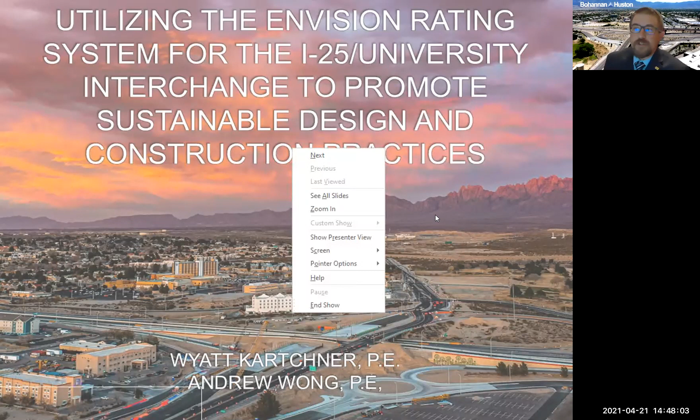Thank you, ladies and gentlemen, for joining me this afternoon for the Alternative Construction and Sustainable Infrastructure session. My name is Roy Gibson, Vice President at Bohannan Huston and ASCE New Mexico Section Past President. First and foremost, I'd like to thank Wyatt and Andrew for sticking with us on the preparation of this presentation, which we originally planned to present last year.

You'd be driving through this construction right before you come into this big conference, but unfortunately we did not have a conference at the location. However, over the past year, we have really seen the growth of the I-25 University project, the team working through the pandemic to deliver a successful project to the department and Southern New Mexico. Everyone on the team has truly created a miracle by working through the pandemic and getting this all completed.

Wyatt Kartchner is a fellow Aggie alumni and principal of the Molzen Corbin Southern Region. Mr. Kartchner was the overall consultant project manager in charge of the I-25 University project that is currently under construction right at the doorstep to NMSU. Andrew Wong, another fellow Aggie, is a project engineer and Envision professional with Molzen Corbin out of their El Paso office.

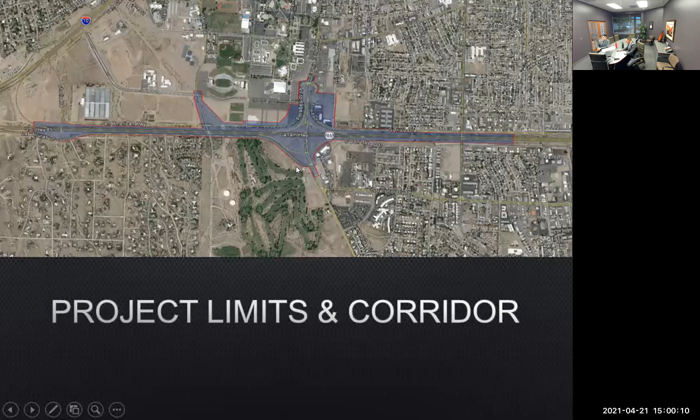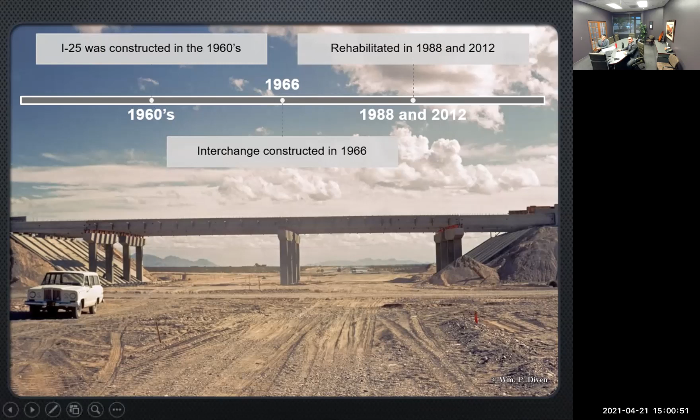What the traffic movements show is that there's a lot of people traveling south on I-25, exiting at University Avenue, and then trying to scoot over quickly across 2 lanes of traffic to turn left into the NMSU campus. At that same time, there's a heavy volume of traffic on University Avenue also trying to go in this direction, and that creates a lot of congestion and traffic at those places.

We also had lots of pedestrian and multimodal issues that we needed to address. We'll talk about this in more detail later, but on University Avenue, there was only sidewalk on one side, there was no pedestrian railing on the bridge, and Andrew will talk about how the bicycle lanes on the bridge were actually kind of terrifying. All of those things needed to be addressed. There were also some geometry issues with the southbound off-ramp, and all of these things combined really created safety problems throughout this entire corridor, which was the driving force behind this project.

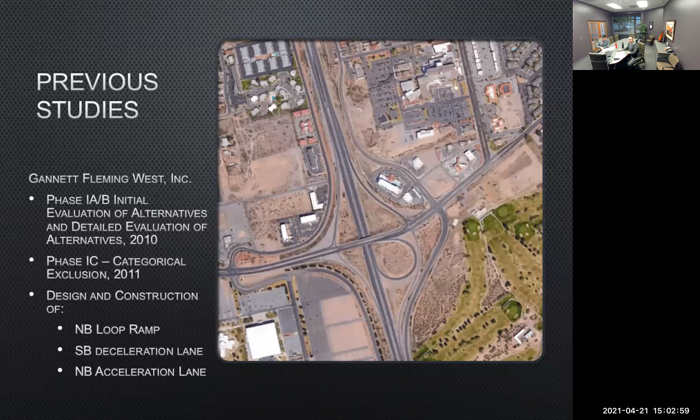This project was originally studied in 2010 by Gannett Fleming West. They came up with several recommendations and alternatives, one of which was the construction of the loop ramp, put in to allow northbound on-ramp traffic an alternative to access northbound instead of having a dual left turn lane, which was also a cause of congestion along University Avenue. They completed their study in 2010, did a CE in 2011, and out of that came the construction of the loop ramp and deceleration lanes in the northbound and southbound directions.

As we all know, changes happen quite frequently. When we started this project in 2016, there had been several things that had changed the way this interchange needed to function, based on changes that had happened in the area.

One was that I-25 had been widened to 3 lanes between University and Lohman. It was determined that a new bridge over I-25 was needed. If the DOT was going to spend a large amount of money improving the interchange, they didn't want to leave an old bridge constructed in 1966, so they wanted to upgrade that bridge as well.

One of the major components that changed was the way NMSU had configured their roadways and roadway network. With this alternative, all local traffic on University and Triviz would have to use Payne Street or Arrowhead. For those of you from this area, this is the road that separates the Pan Am Center from the parking lots to the east.

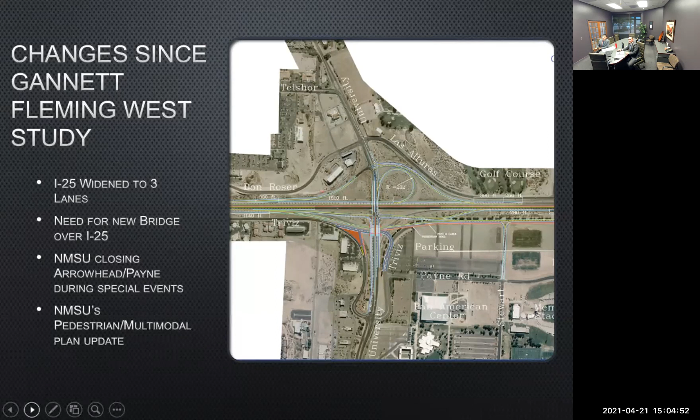When our team got this project, the DOT asked us not to go back to the very beginning of the study phase, but to look at various alternatives through the IACR process. Based on where this project was located, one of the things we determined early on was that there were really 3 partners in this.

There was the NMDOT, which is the owner of I-25 and portions of University Avenue. There was NMSU, located on the south side of the interchange, and then also the City of Las Cruces, located on the north side of the interchange. So what we did early on is create that stakeholder group and collaboration, which was with us from the very beginning, from the planning all the way through design and construction.

In our early meetings, one of the things we wanted to establish was the project goals, and these are the 4 goals we came up with. First, to provide access directly into the NMSU campus from I-25 southbound. Since we were going to be doing that, one idea was to put Triviz through there as well, with a grade separation for Triviz that would free up additional capacity at that signalized intersection at University and Triviz, and help University itself have a better level of service.

ADA and bicycle improvements was also a goal. We know this area is continuing to grow, and there are lots of pedestrian facilities here, so we wanted to enhance that as much as we can. And since we went through this whole process of getting people into the NMSU campus, we also wanted to help facilitate getting them out of campus. So one of the goals we added was to provide access to I-25 southbound from NMSU.

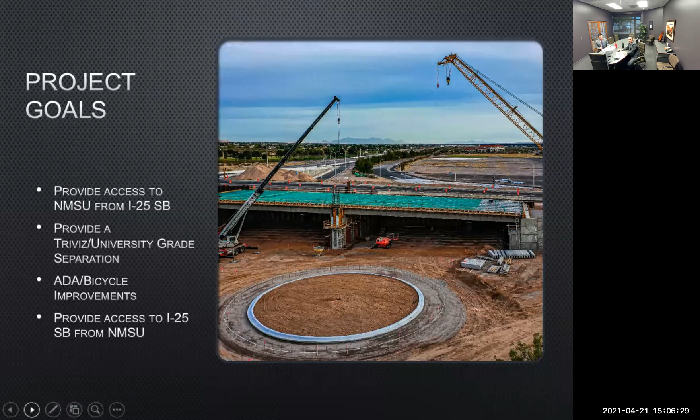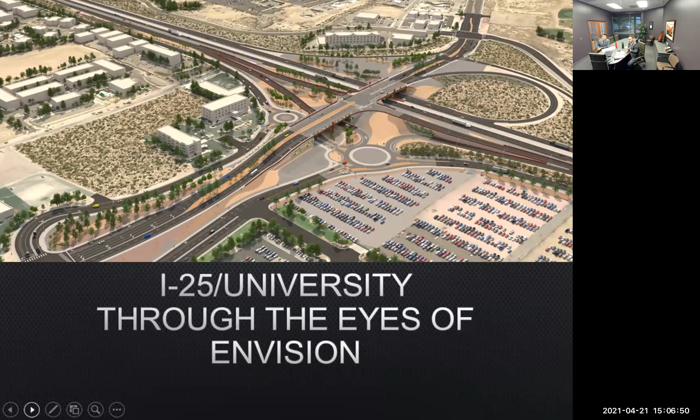So what we're going to do now is talk about the development of the interchange using Envision. You've got the background of what Envision is, and the background of what the project is, so we're going to mesh those together. We want to show you how the principles of sustainability are woven into our lives as design engineers, and how we can do small things to improve sustainability.

So the first thing that we did for this project, and have done on other projects now, is use the Envision checklist. The Envision checklist is a tool that is free to anybody to use. You don't have to pay, you just need to sign up and make a free account on the Envision website through the Institute for Sustainable Infrastructure, and then you can have access to some of these basic tools.

The powerful thing about the checklist is that it helps designers and planners think through the various elements of a project, beyond maybe the specific scope problems that have been identified. So that's something that we did very early on for this project.

As we walked through each of the credits, you can assign yourself a score as you read the description, and you get an idea of some of the different things you could do to improve the sustainability. This is where a lot of the brain juices start flowing and the ideas start popping out, because they're describing general sustainable practices, and then you're merging it with your project. A lot of times you start making connections you hadn't made before - oh, maybe we could do this for bicyclists, oh, maybe we can improve light pollution, I hadn't thought about that. These are the types of things that the checklist helped designers do.

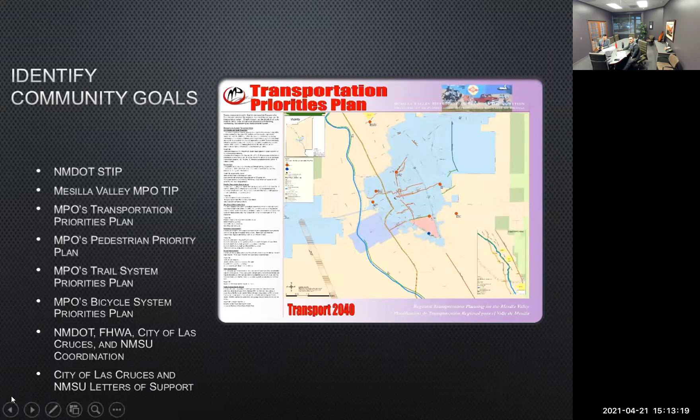So obviously the first thing to do is to identify the community goals. As Wyatt mentioned, we did a lot of research and study into the why and the reasoning for this project. There are a lot of resources out there. Most cities have transportation committees, and of course NM DOT has been studying this project for a long time. We looked through all of these entities' websites and documents, and a few things began to pop out as common goals among these different plans and priorities. These things were direct access for southbound I-25 to NMSU, the grade separation at Travis, and definitely from multiple places, a lot of desire for better bicycle and pedestrian connectivity in the area.

So with that, we began the IACR process. Now the IACR is, of course, an FHWA requirement. The FHWA wants to protect the integrity of the interstate system, and so they want to make sure that any project affecting the interstate is well studied to ensure there aren't going to be adverse impacts. This is a good example of how the existing processes in place are actually quite sustainable. They align well with sustainable practices.

Through this process, we had to analyze the existing and future year traffic model, and then compare that to each of the alternatives that was developed. We developed probably well over a dozen different alternatives and advanced 3 or 4 of them to detailed modeling. Through that, we were able to determine that our preferred alternative improved on many of the different metrics of effectiveness, like level of service, vehicle hours traveled, vehicle mile traveled, and intersection delay, not to mention providing other benefits to the community.

So as you can see here, this is one of the final renderings of that preferred alternative. This is basically what it's going to look like when construction is done. You can see here the new southbound off-ramp that peels off from I-25 and comes under University and ties into the roundabout on the south side, giving direct access to NMSU, as well as Travis, which does the same, avoiding the busy intersection with University.

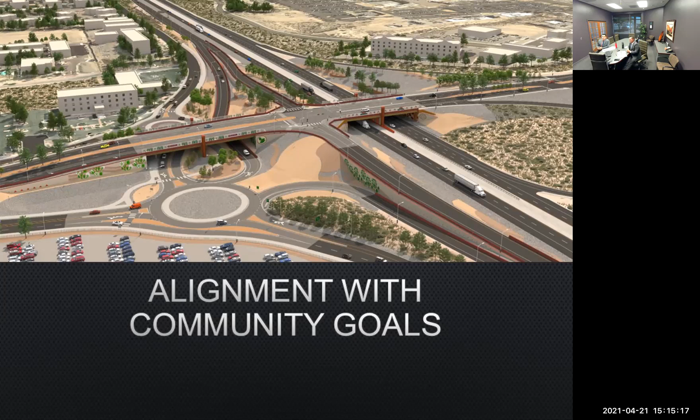You can see here the pedestrian facilities, the bicycle lanes, the sidewalk that was added. And we felt that this alternative would be able to meet these community goals.

So one of the other aspects of QL 1.1 is to address adverse impacts. This was something that our team really thought of right from the beginning of the project through the alternative analysis. One of the goals we set right from the beginning was to maintain traffic in two lanes in each direction on University Avenue throughout construction as much as humanly possible, so they could still construct this. We also wanted to maintain 2 lanes of traffic on I-25 to the extent possible. We didn't know back when we were doing this design that we were going to live in a COVID world and traffic would be cut in half or less. But we set these goals right from the beginning.

This actually started with our alternative analysis, because we knew right at the beginning that the only way we could construct a new bridge over I-25 was to offset that bridge from the existing structure. So we looked at alternatives of pushing the new bridge to the north of the existing structure or to the south. What we actually found through our analysis was that when we pushed the bridge to the north, not only were we able to maintain 2 lanes of traffic in each direction on University Avenue while the new bridge was being constructed, but it also allowed us to move this south roundabout further to the north, which minimized the amount of right-of-way take that was necessary. Just little factors like that made a huge impact and reduced the adverse effects this project had.

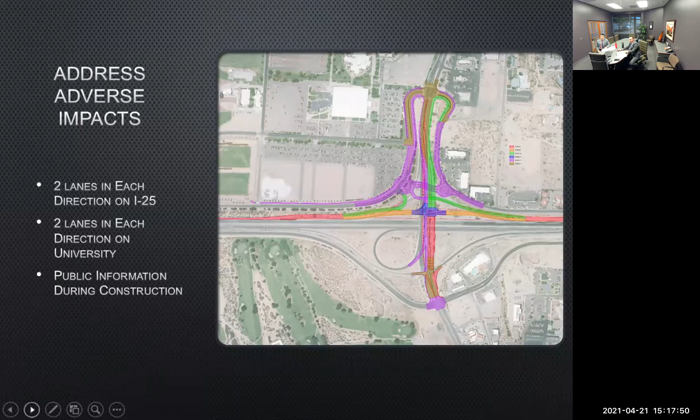One of the Envision credits involves the community in the design process. This is something the DOT already does a very good job of, especially with corridor studies. They have public involvement that's necessary for almost every project we work on. Envision recognizes that gaining public support and involvement is really important to the community and the project. So on this credit, we were actually able to achieve nearly maximum points just by following the process that's in place right now.

But we recognized that a project of this magnitude, we didn't want to just follow the original process of having a meeting with 25 or 30 people show up with some placards. So we took this public involvement to a different level. In 2016-2017, we started virtual public meetings. I know that's become the common thing now that we live in a COVID world, but at that time these things were pretty new.

What we did is we had a pre-recorded segment that included our stakeholders - the design team, NMDOT staff, NMSU staff, and City of Las Cruces staff, all involved in this public involvement process. They recorded a session, and then we had a meeting which really showed that our team was working together. So we did a combination of a live and pre-recorded session.

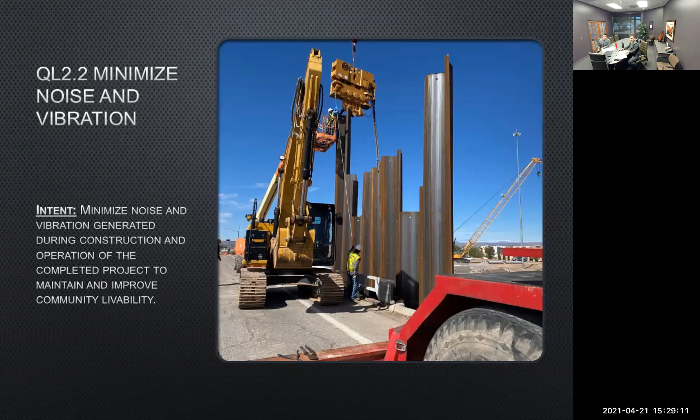QL 2.3 is about minimizing light pollution. So we'll just talk briefly about this. The intention of this project is to look at the context, right?

Some cities have that glow and it's bright, and one project isn't going to change that. But we have to understand the context, and Las Cruces is a fairly small community with relatively dark skies.

So for this project, one of the elements we included was the removal of several high-mast lights that provide a lot more light pollution, and we took those lights and converted them down into LEDs at street level.

So not only does that save on energy costs, but it also improves the light pollution significantly for the community.

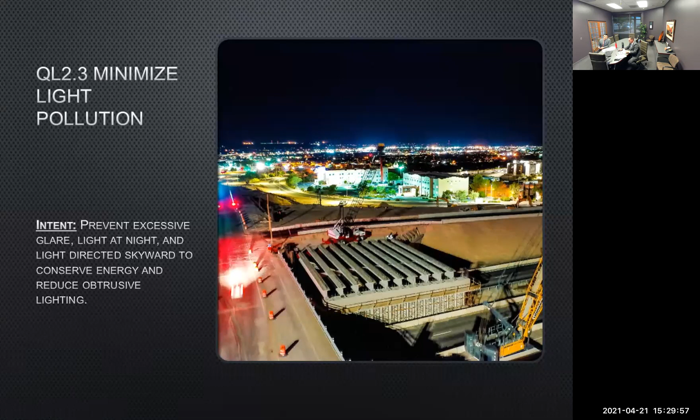QL 2.4 is improving community mobility and access. This is a credit that's going to be the focus of almost every single transportation project. Now there are other projects you could do for Envision, and you're going to have to work harder to meet this credit.

But for this project, we were able to meet this credit very easily because the entire purpose of this project is to improve mobility and access.

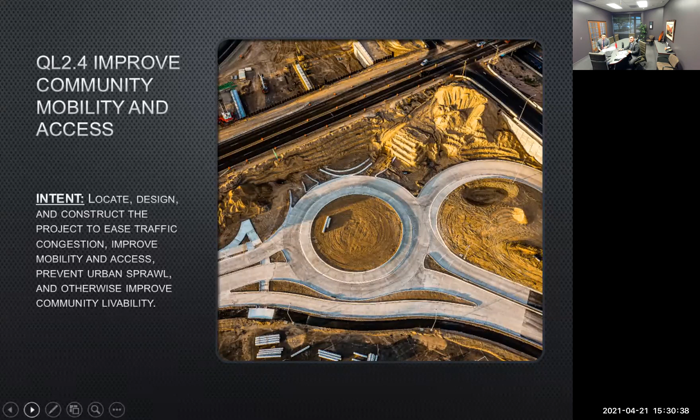We've talked about this quite a bit already, but we were able to improve level of service and a lot of the metrics, as well as improving mobility for multimodal access of pedestrians.

That's of course related, and if you're getting the feeling, a lot of these credits interact with each other. You get points in one credit and you're going to get points in another credit.

So QL 2.5 is about encouraging alternative modes of transportation. Alternative modes of transportation include things like bicyclists, pedestrians, public transit. And again, the context of a project is very, very key when you're thinking about alternative transportation modes.

As we discovered on this project, alternative transit doesn't have to be an extremely large cost item. A lot of times it's the same amount of materials, you're just orienting things a little bit differently.

to provide a higher level of comfort and safety for pedestrians or bicyclists. And actually on this project, early on in the design phase, the city of Las Cruces provided a training from the National Association of City Transportation Officials.

NACTO, who has a design guide that provides a lot of tips and tricks for how to develop bicycle lanes and pedestrian facilities in a way that is better than maybe what we are exposed to right now.

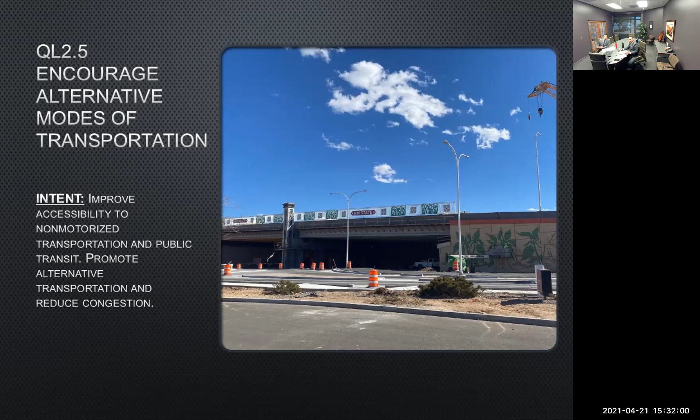So it was really good timing from the city because we were able to implement a number of those elements onto this project.

So in this image, you see some of the things we did for alternative transportation modes. The dark blue lines are the existing multi-use trails in the area. You can see the Triviz Trail to the north and the Sisbarro Trail system to the south, as well as a connection to the NMSU pedestrian network. But these things are not connected.

If you're familiar with the area, you'll see people come all the way up to the end of the Triviz Trail, stop at the light, and turn around because they don't want to cross that busy intersection. With the green line, you can see the extension and connection of that trail network. We were able to bring revitalization into each of these existing infrastructure networks by connecting them.

And that improves not only transportation effectiveness but also recreational opportunities. In addition, you have bicycle lanes on Triviz and University and new sidewalks in all directions, particularly across the I-25 University Bridge, which provides a critical link to the medical and residential areas east of this project.

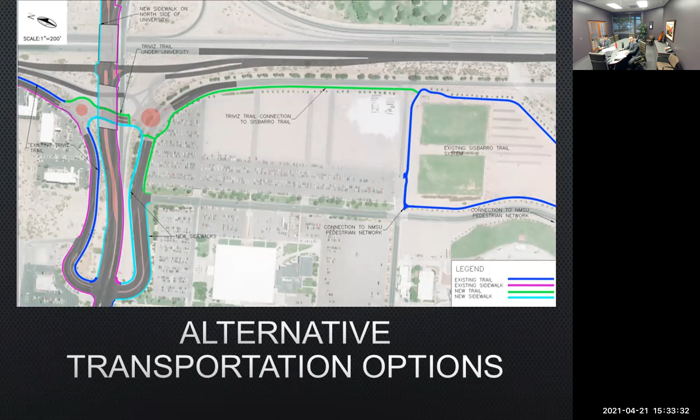QL 2.6 is also closely linked, and it involves providing site accessibility, safety, and wayfinding. This is all about thinking through the experience of using this project. Is it easy to navigate? And most importantly, does it improve safety?

The existing intersections on this project have a notorious reputation for being dangerous and unfortunately even deadly at times. Not too long ago, a student lost her life going through this intersection—I think it was while we were in design for this project. That really brought into perspective the importance of safety.

A few of the safety elements are, of course, the roundabouts. Many people in the community are unfamiliar with roundabouts, but we felt it was something we couldn't not do because of their safety advantages. They can reduce injury crashes by as much as 70%. You may have just as many fender benders, but they won't be as deadly because you avoid those head-on and T-bone type accidents.

So this was something we did for safety improvement, and the other improvements to the intersections, especially to the bicycle and sidewalk facilities, are expected to significantly improve safety for all users.

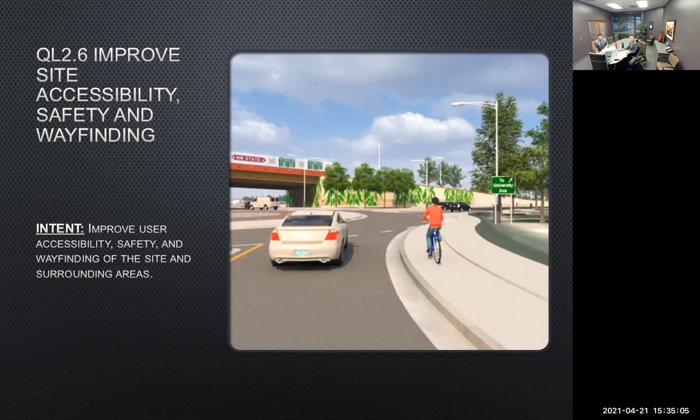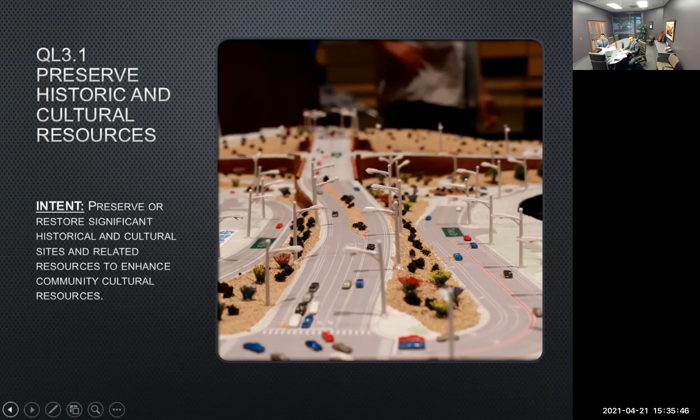QL 3.1 is something we didn't actually have to do on this project, but it's one of the credits involved as part of the NEPA process. QL 3.1 is to preserve historic and cultural resources. With this project, and all federal projects, we do a cultural resources report where we conduct surveys, look at the findings, and then if anything is culturally significant, we look at ways of preserving or mitigating that. So this is another way that, while it didn't apply here, you can get points by just following the simple process.

QL 3.2 and 3.3 are closely related, affecting the aesthetics and local character of a project. As most of you know, this interchange is old—just old gray concrete with hardly any aesthetic improvements. But at the same time, it provides a gateway into the city of Las Cruces as well as NMSU. So there was quite a bit of motivation and collaboration behind making this project beautiful, something the community could stand behind and be proud of.

Wyatt's going to talk a little more about some of the elements of this project and how we developed the arts.

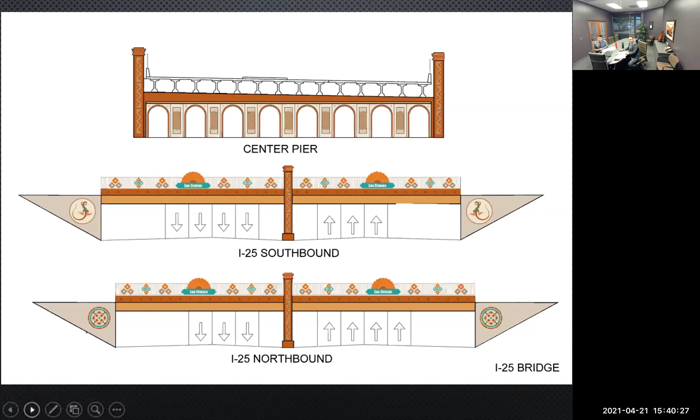This is the bridge over I-25 at University Avenue, and you can see she has various designs here. On the wing walls, she has the New Mexico whip-tailed lizard, and also a native New Mexican design. On the pedestrian railing, rather than just use the standard chain link fencing pedestrian railing we often do, we incorporated a different kind of pedestrian railing that included this artwork. It includes the city of Las Cruces with the sunburst and all of these native triangles. You can see in these next pictures what it actually looks like, how it's able to come to life.

On the abutments, she also incorporated kind of a larger-than-life natural art. On the left you can see she has the ocotillo plant, and on the right, the agave. She also incorporated bees throughout this entire art piece. She recognized that bees are very important to our ecosystem, and you can see them incorporated throughout the entire process. Then this bird is actually something that was inspired by her grandmother. So it was just little things she incorporated to make this art not only fit the place, but also reflect her local flavor.

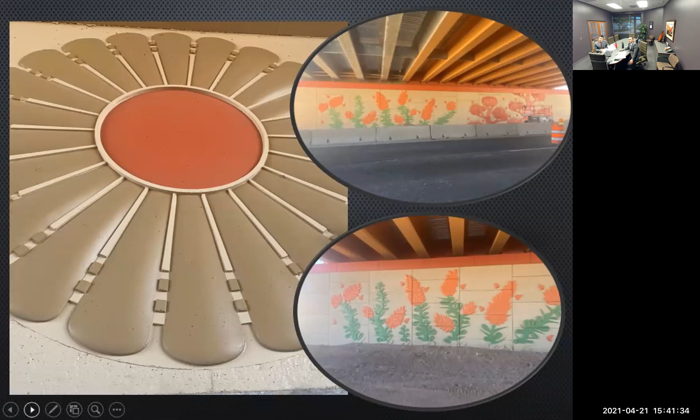So you can see what this looks like up close in real life. These pictures were actually taken yesterday; they're actively painting the bridge right now. It's really nice to drive through and see how much it's coming to life and changing every day. Again, the bridge that crosses the southbound off-ramp and Triviz under University Avenue was that gateway to NMSU. Colette used NM State on the pedestrian railing, and incorporated a diamond pattern on the concrete wall barrier.

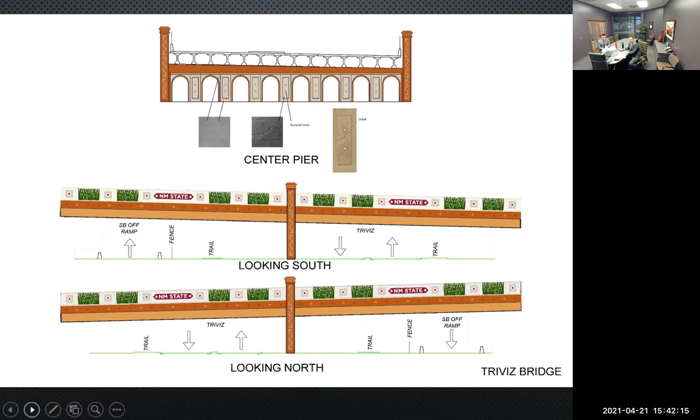And in the center pier, there are arches that were incorporated in there, and again she had a simple pattern on there. Something we put on both bridges for additional aesthetic features were these pilasters that come up above the pier cap and stick up in the air, just another feature to make this area more beautiful. So you can see here's what that looks like now.

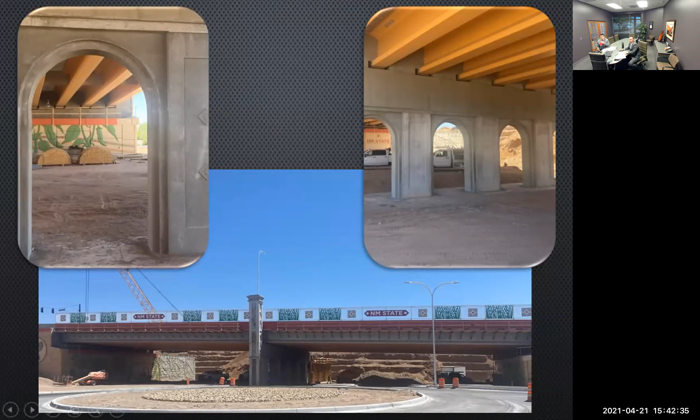Something that's really important here is that while the bridge carrying I-25 traffic will be much higher speed, this bridge will have traffic at a much lower speed, and also pedestrians. So they'll really be able to enjoy this art, look through these arches, and see all the detail that's been put into this.

Again, on the abutments, she's incorporated more native plants. NMSU is an ag college, so she incorporated some of those ag themes. We have the cotton plant, the onion seed, and of course the green chili. And then she incorporated NM State on here.

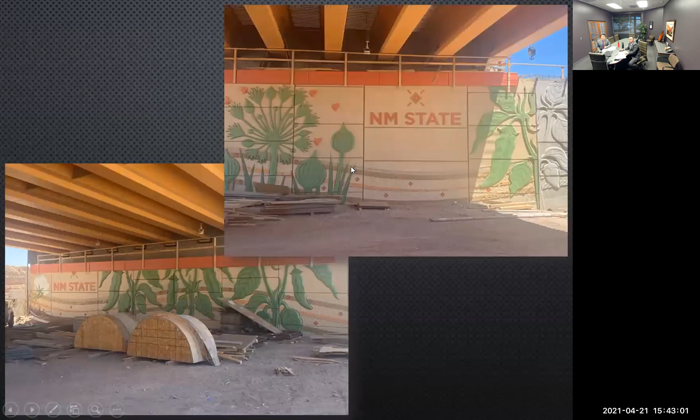So you can see what this looks like after it's in construction, with the phase line of the bridge here—part of it's been painted, part of it hasn't. As this has been developed and we've watched it grow, it's been amazing how the artwork has been really beautiful even before it was painted. It was really amazing to see how that art was done.

One of the very impressive features about Colette was that she was a graphic designer, as she called herself, and she did most of her art in computer-based software. So she actually provided details like this that we were able to simply put on the plan sheet, stamp, and put out to the contractor.

You can see the details she incorporated onto all the stems of this agave plant and all the leaves. She calls out the colors, the relief, and then the contractor was able to obtain digital files and create these forms, which were used to create the panels. This was actually MSE walls that we're using on this entire project. The contractor had to figure out how to form these panels so they could have that repeating pattern and save money—that was quite an involved process on their end.

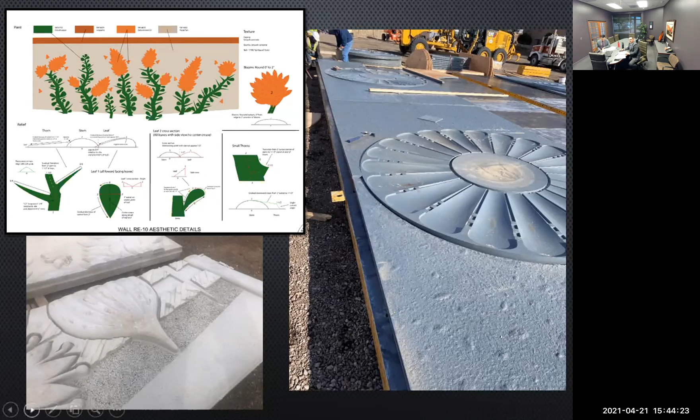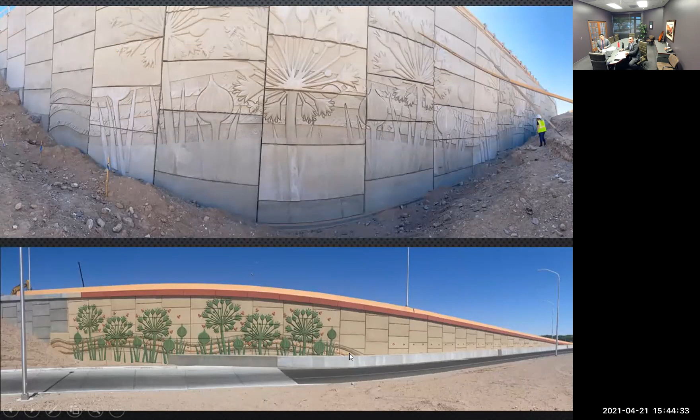So we're going to start moving a little more quickly through the different credits. The next section of Envision is called leadership.

So we have another poll about what leadership means in relationship to sustainability. Is it coming up with a project logo and slogan? Does it mean a project has sustainability on its website? Does a project collaborate and have teamwork between the owner, stakeholders, project team, and community? Or does it mean bringing snacks to the staff meeting? I think that's great leadership, personally.

So LD 1.1 kind of answers a lot of those questions—it's about providing effective leadership and commitment. The thing about sustainability is it's a buzzword, something I've probably said three dozen times already in this presentation, and you'll see it everywhere. But what Envision provides entities, organizations, and companies is a way to move beyond lip service into actual demonstrable, verified sustainable practices. So LD 1.1 is actually kind of self-fulfilled by Envision—if you're doing Envision, you're moving past lip service into commitments and demonstrable examples of sustainable practices.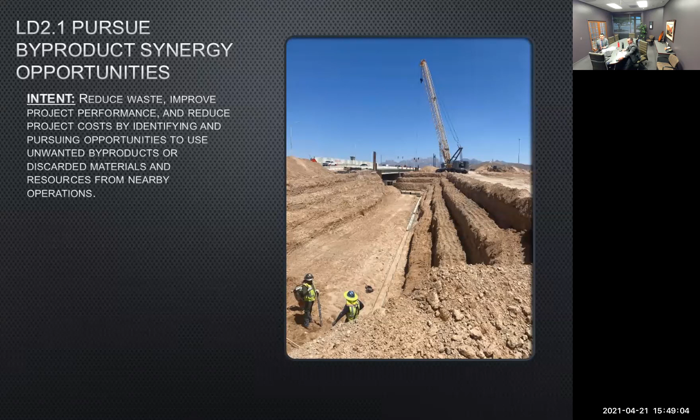Our next example is similar, but more within the project. It's about infrastructure integration. A lot of times, because engineers get specialized in specific areas, we tend to just solve our one problem and don't look at how our system may provide opportunities or problems for other systems. So one of the things we did on this project is work closely with our landscape architect as we developed the drainage design, providing multiple stormwater harvesting opportunities throughout the entire project.

If you've ever driven down a desert path, you can see that a lot of times the landscaping was really struggling, and then by accident there might be a tree planted next to a stormwater culvert that happens to be doing really well because it gets so much water every time it rains. That's something we were trying to do intentionally with this project by integrating the drainage design and the landscaping design.

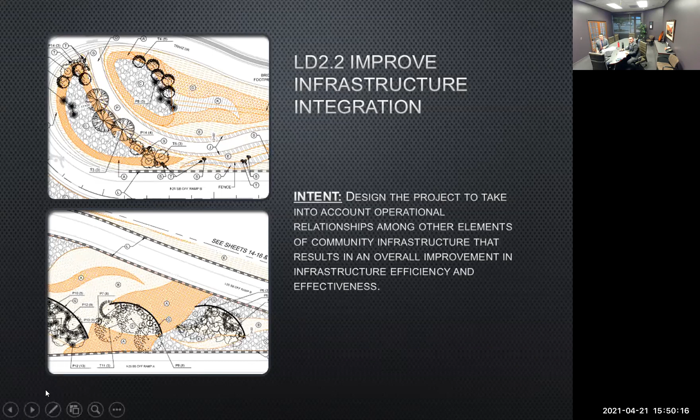LD 3.1 is about planning for long-term monitoring and maintenance. That's making sure you do simple things that make your life easier down the road. Some of the things we incorporated on this project to minimize required maintenance was using PCCP.

Concrete paving in the roundabouts—we have the two roundabouts as shown, with only a few hundred feet between them. One of the decisions our design team made to make this easier to maintain down the road was to go with concrete between those roundabouts. We also did concrete between the two bridges, which are again separated by only a few hundred feet. So rather than have a few hundred feet of asphalt, we put in PCCP. Not only will that section of the bridge last longer, but the roadway will too, with the turning movements and things like that.

Other things we looked at for maintenance included riprap on the slopes. We had a lot of 2-to-1 and 3-to-1 slopes, and we could have gone with the standard route of a Class C or Class A seeding. However, we wanted this to be easy to maintain, almost maintenance-free from an erosion standpoint, so we put in Class G riprap on the slopes. We didn't want it to just be gray rock against these beautiful painted walls, so we incorporated different colors and patterns of riprap to beautify the area while creating minimal maintenance in the future.

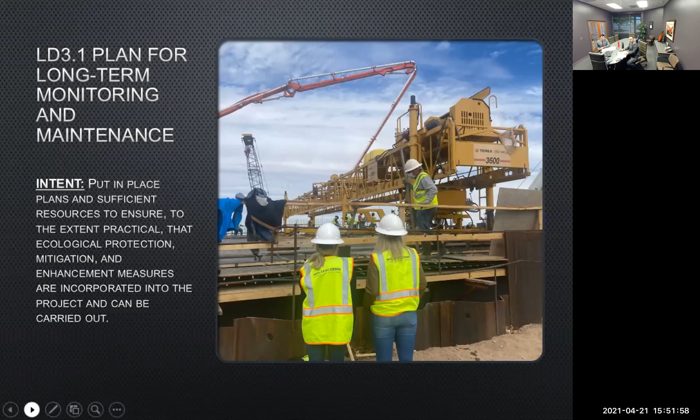LD 3.3 is extending the useful life of the project. We all know that bridges are now being designed for 50, 70 plus years. We didn't want to design these bridge structures without thinking about the future of I-25 and this area. So with a little extra money up front, we were able to provide a bridge span that was just a little bit longer, allowing I-25 to be widened to three lanes in each direction in the future. It seems trivial, but adding a few hundred thousand dollars now can save millions later. Another way to do that would be adding an additional inch to your asphalt lift, or things like that.

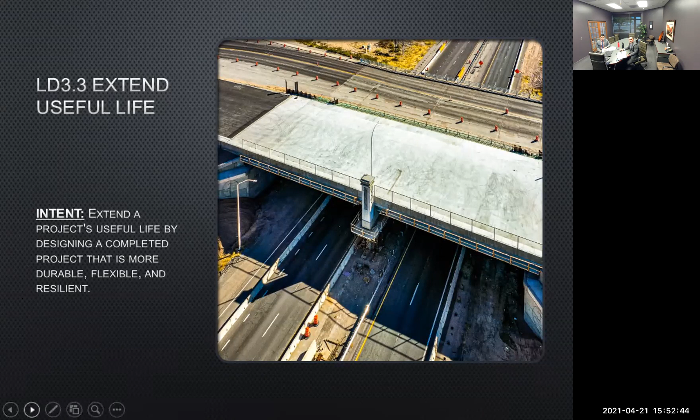Moving on to the next credit category, we have resource allocation. Going to the website, we have another poll about what resource allocation means: A, B, C, D, and of course, everybody's favorite is E.

Starting with RA 1.1, we're looking at reducing the net embodied energy. Net embodied energy looks at the energy consumed by the creation of materials all the way until deconstruction. This is a pretty involved process, and for future reference, we would probably hire a professional, since there are people who specialize in developing these types of analyses. This was one we weren't able to get points on, but if we were to do it again, there would be some pretty easy points we could get. Doing that analysis also applies to a number of other credits down the line.

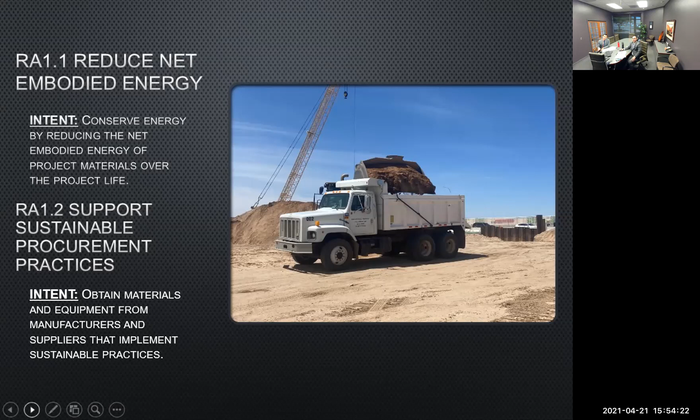RA 1.2 is about supporting sustainable procurement practices. We include this not because it was something we implemented on this project, but because it's an area the industry could improve. That means developing standards for procurement from manufacturers, to encourage sustainable practices among our manufacturers as well.

RA 1.3 is the use of recycled materials. This is something contractors actually do a very good job of, even without any sustainability requirement. A contractor that gets the job has often found ways to save money by reusing materials — they may crush existing concrete to use as backfill, use millings sent back for asphalt, or separate reinforcing steel from concrete so they can sell it back. So this is something contractors do well, and it was easier for us to demonstrate that this credit was met.

Something we did on this project to make sure the contractor followed through with the sustainable practices we planned was write a special provision for sustainable practices. This provision didn't put requirements on contractors — we set goals, but didn't want it to drive up costs significantly, especially since this was the first time being used on a DOT project. Those goals turned out to be very easy for the contractor to achieve just by following their standard processes.

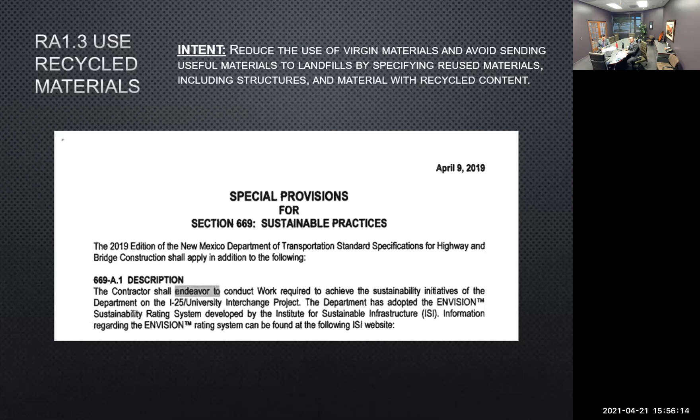In order to pay for this special provision, we established two item numbers. We have an Envision certification fee, which covers the certification, documentation, and third-party verification of Envision. And we had an Envision documentation fee, which was for the contractor's time to provide documentation to us so we could upload it to the website.

And then RA 1.4 is the use of regional materials. Here in Southern New Mexico, we are really blessed and fortunate to have lots of native materials available, including two asphalt and aggregate plants that are just to the south of this project, about 10 miles away.

That really helps minimize transportation costs and impacts to the region by bringing in materials from outside. I want to give you an example of a way that something may seem sustainable, but really may not be. We worked on a project about 10 years ago that was actually a LEED project for a building, and one of the credits we were looking for was a way to do something with stormwater harvesting.

So we incorporated pervious concrete pavement into our design and specifications for that project. Well, that all seems great—you're going to capture that stormwater instead of just putting it into a storm drain system that goes to a pond where it grows mosquitoes and then finally evaporates.

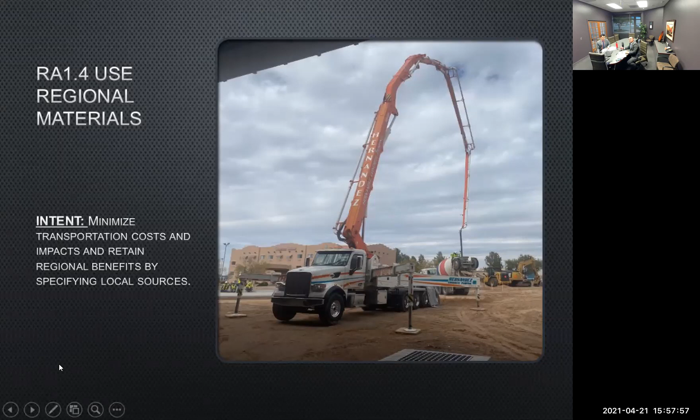But in order to do this, the contractor actually brought in resources from St. Louis. They brought in the labor force from St. Louis, and they brought in the materials from St. Louis. So while it was a good product, the actual sustainability of it wasn't very good. We have aggregate plants and concrete plants just up the road, but they shipped all of these materials and employees in to do this. Envision recognizes that that's really not sustainable—you should use your local regional materials and regional workforce.

Our RA 1.5 is about diverting waste from landfills. Obviously this is something many contractors already try to do—if they have a way to reuse something on site, they're going to do that.

Initially we thought this credit involved just construction waste, but this credit in version 2 of Envision is actually more focused on operations waste. So that's for something like a wastewater treatment plant that generates sludge on a weekly basis—where is that waste stream going to go? One of the neat things about Envision is that they are developing and continuing to improve as an organization and as a system.

Version 3 recognized that construction waste also needs to be accounted for, so version 3 looks at both construction and operations waste, where it's going and what percentage of it is being diverted from landfills.

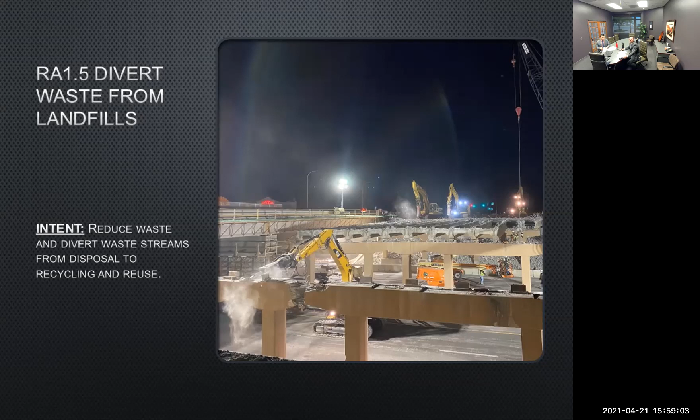RA 1.6 is related, but it's talking about earthwork. Again, we want to show that many of these credits are very familiar to engineers. Most engineers are kind of obsessed with getting their site balanced. So this is all about whether you're keeping your materials on site and finding ways to use it. If you can demonstrate that you use 100% of it, that's top credits.

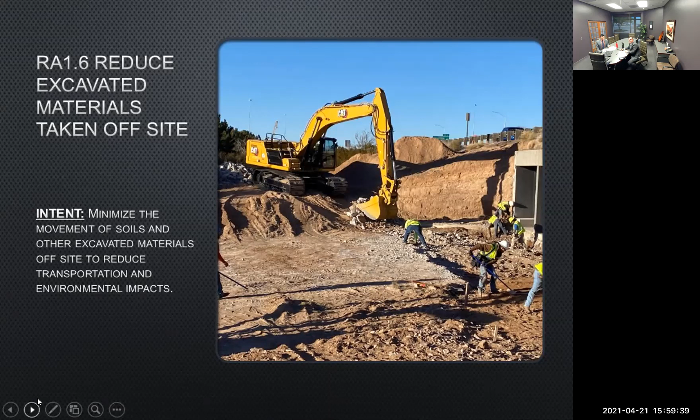RA 1.7 is looking not just at the deconstruction you have to do for your project, but what's going to happen to your project in the future. Again, many of the materials civil engineers use are very recyclable—asphalt, concrete, and steel can all be broken down and reused.

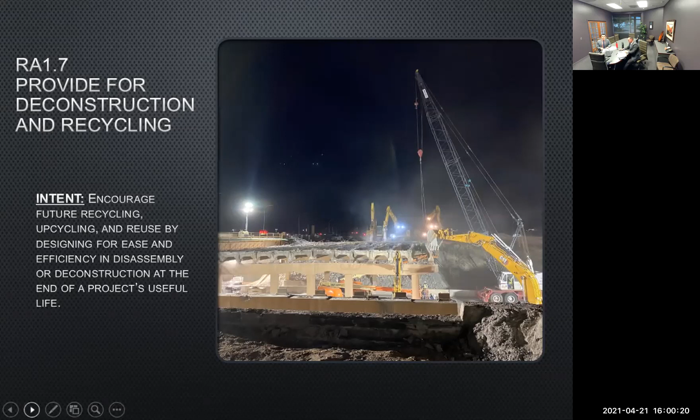But there are other types of construction that may use complex composite materials or process them in a specific way that makes it difficult to reuse. This credit is meant to discourage that, so that when a project reaches the end of its life cycle, it can be broken down and the materials reused again.

RA 2.1—we kind of talked about this with the light pollution. Previously, this project had high mast lighting with sodium bulbs, and we basically took those down, sent the lights to be reused elsewhere, and replaced them with LED lights. Just by replacing with LED, we were able to demonstrate that the energy cost for lighting this interchange would be reduced by 40%.

RA 2.2 is about using renewable energy. This is something we tried to look into, but we were unable to bring it into this project. It may be something that as an industry we could grow in—how can we bring renewable energy into our projects, especially in very remote areas?

RA 2.3 is about taking those energy systems and making sure they're operating properly. Again, this is another one where, if we had more experience with Envision, we would have been able to build in systems to achieve this credit, but because we were new at it, we weren't able to.

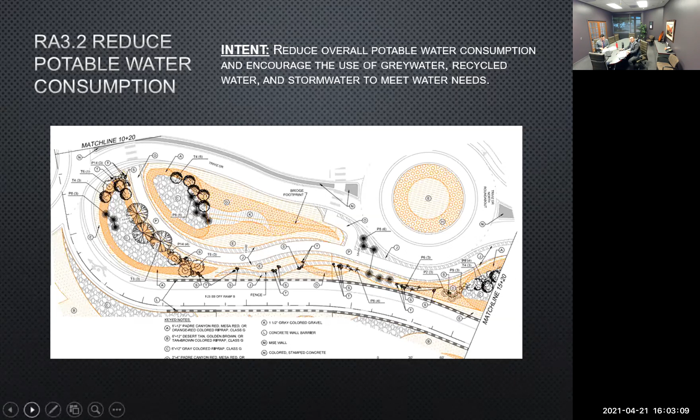The next credit here is the natural world, and again we're going to have one more poll here. The natural world is really about the siting, the land and water, biodiversity, innovation, and need. You guys want to go ahead and vote on that one.

The first part of the natural world has lots of credits that get lumped together, and they follow our standard NEPA process. With any federally funded project, we need to follow the NEPA process, we all know that. You can see the NEPA process and what it's made up of in this bottom image, and if you look at the credits on top, they all align very well with NEPA: preserve the prime habitat, protect the wetlands and surface water, preserve prime farmland, preserve greenfields, protect biodiversity species, control invasive species, maintain wetlands. All of those things are part of the NEPA process.

So again, this is an area that just by following the standard process, we're able to gain credits in the Envision process.

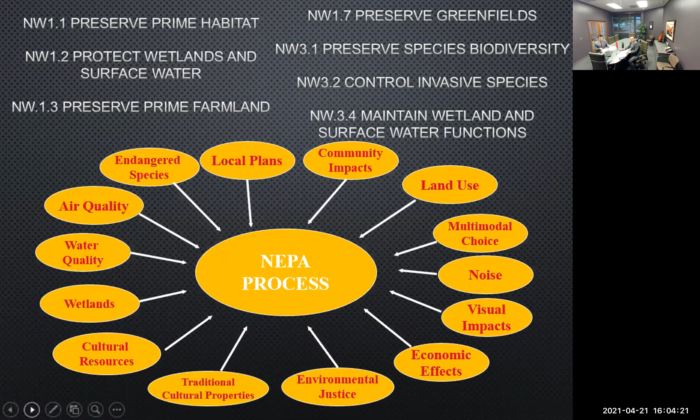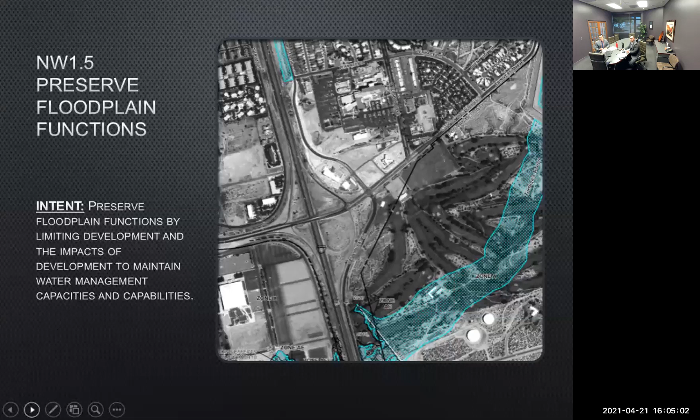One of the credits we want to highlight was Natural World 1.5, about preserving floodplain functions. This is another credit that engineers typically do quite well in, because the NMDOT or city's drainage design processes take into account floodplain, and you have to design for the 50, 25, or 100-year floods. So just by doing our standard design process, we were able to achieve some points, and it also encouraged us to improve even further than what might be standard.

Similarly, Natural World 2.1 is about managing stormwater, and the goal here is to take the infiltration levels to pre-development levels. So not only are you capturing the additional water generated by your impervious systems, but you're looking at what it was like before, and whether you're able to capture that water and return it back to the aquifer through infiltration.

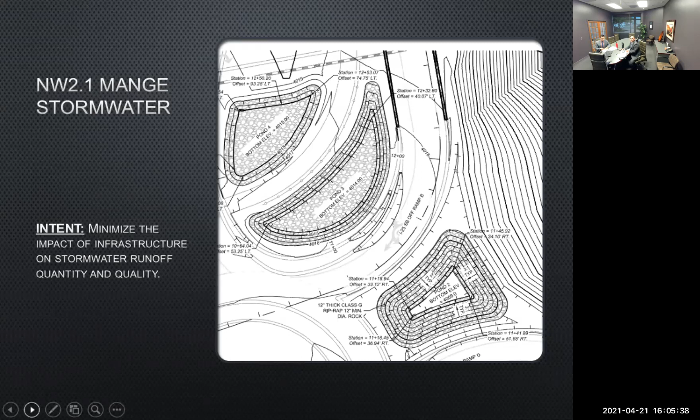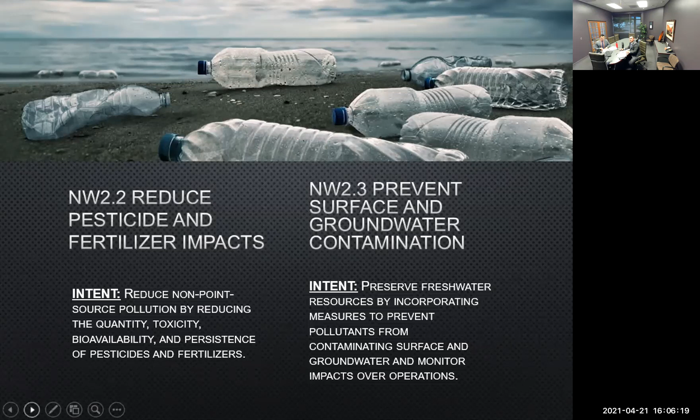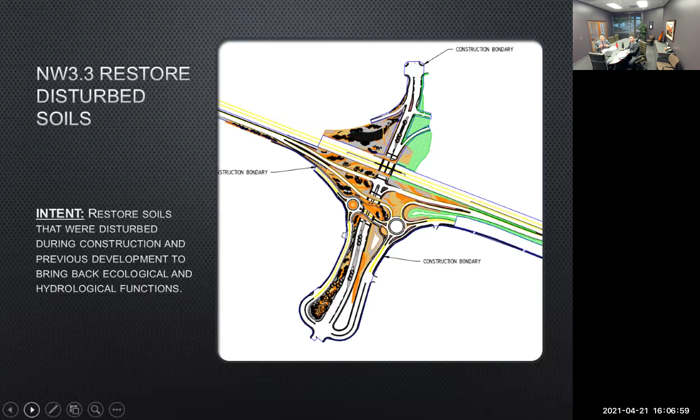Natural World 3.3 is about restoring disturbed soils. Disturbed soils can't hold nutrients and are very susceptible to erosion. Usually there's some level of effort made to restore disturbed soils, but it's something we put more energy into on this project, as Wyatt mentioned—additional riprap, additional landscaping and seeding, and avoiding steep slopes so that you can seed it, rather than having it wash away because the seeds can't take. So we got credits for this one, restoring 100% and even more than previously disturbed soils.

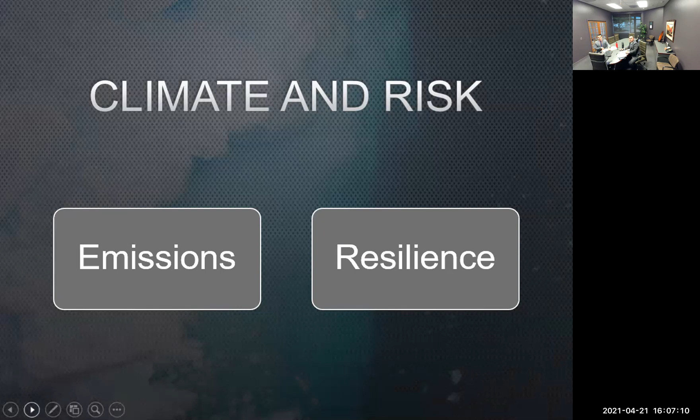Okay, last category is climate and risk. So we have one more poll about what climate and risk means.

I want to highlight that adjusting the thermostat without asking your spouse is climate related and very risky, especially for me, because I have a pregnant wife. I've learned that lesson the hard way.

The purpose of this category is to not contribute to further climate change with our emissions, and also to acknowledge that climate change has already happened and will continue to happen. Can our projects adapt and respond to the changing environment they're going to be in?

CR 1.1 is about reducing greenhouse gas emissions. Of course this is something we all want to do, but it's hard to quantify. This is another one where we would have needed a professional to do a life cycle carbon analysis to demonstrate that this project would reduce greenhouse gas emissions.

We believe it would have, because of taking cars off the road and creating additional efficiency and reducing delays at intersections. Likewise, CR 1.2 is about reducing air pollutants, and that's again something we wouldn't have been able to prove, and maybe could have if we had the chance to hire a professional to do that.

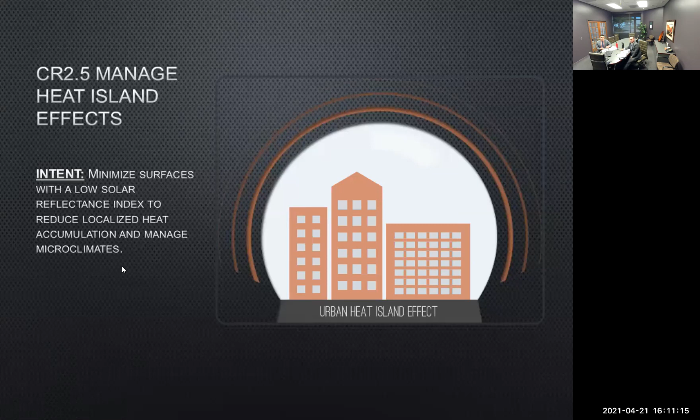Now that we've gone through the large majority of the Envision credits and shown you how it all applies to the university interchange, I want to walk you through the final product here.

As you guys can remember, the four goals we had at the beginning were: first, to provide access from I-25 southbound into the NMSU campus. We did this with the southbound off-ramp that goes under University Avenue into the large roundabout on the south side of University Avenue. Our other goal was to provide a grade separation for Triviz, which we did as well, tied together with two roundabouts.

That not only allows traffic to be reduced at the signalized intersection, which will reduce delay along University Avenue, but it also provides a different way for pedestrians to cross University Avenue, and a much safer way for them to cross. Another goal was to improve pedestrian and ADA facilities, and as Andrew pointed out earlier, we extended the trail system and trail network throughout this corridor.

Something that we did is we didn't put any pedestrian crossings on interstate ramps, so you can see all of our crossings are on the local streets where traffic should be slower and people are more expecting a pedestrian to be there.

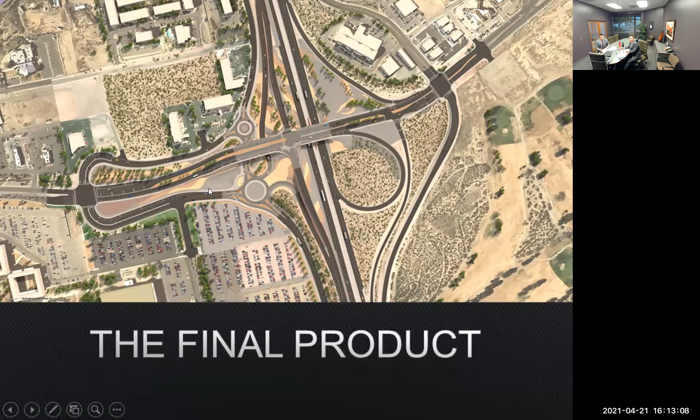We also met that final goal of putting a ramp from NMSU onto I-25 southbound. So you can see, just by following the process, we were able to meet the goals, but we were also able to do little things such as using the ponds and stormwater harvesting to develop this. Really following the process allowed us to create a new interchange which meets all of our goals, but also is going to be a beauty for the community in years to come.

So I'm sure many people are wondering just how much work is the Envision process, and it is a good amount of work. But what I appreciate about it is that, for the most part, it's not busy work. It's work that you're doing to make sure the design is progressing in the direction that you want it to progress. So a couple of tips and tricks I have for using this process is using the checklist very early on.

As I mentioned, this can be used as a brainstorming tool. Whether or not you're going to get the project verified, it helps designers and planners think a little bit outside the box and think of other areas for your project to be sustainable.

Second tip is documentation. There are conversations that I know we had at meetings that would have made my life a lot easier, but they just never got written down. So documentation is key for this process, along with getting organized. Naturally, you're going to have documents, and you've got to have a good system - spreadsheets, file systems - to get this organized. So get familiar with the process and get organized.

And next, of course, register the project early. The verification fee comes at the end to get it verified, but you can get the project registered earlier, and that enables you to ask questions and get connected to the Envision staff, who are very, very helpful in helping you get your project across the finish line.